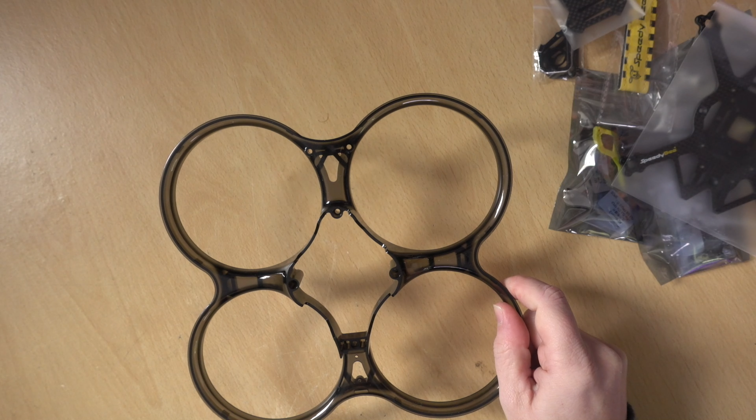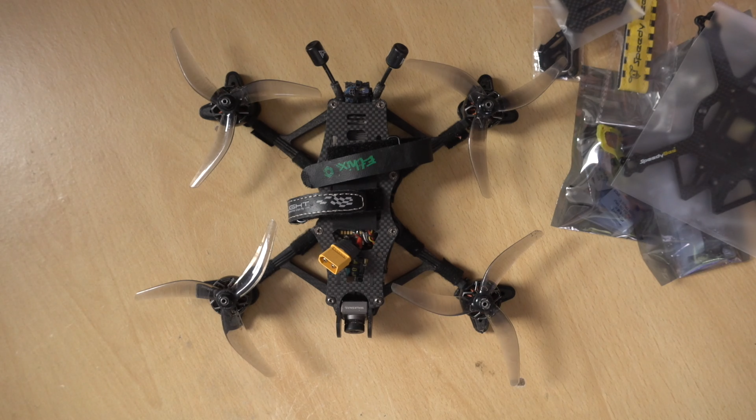Now I was hoping to do an actual build of this in this video, but unfortunately parts haven't arrived, so I'm just going to show you this and I'll do the build in a separate video. I was hoping to do the usual trick of chuck it on the table and all of a sudden it's built, but seeing as we don't actually have the parts, I can't do that. But we can still take a look at what we get.

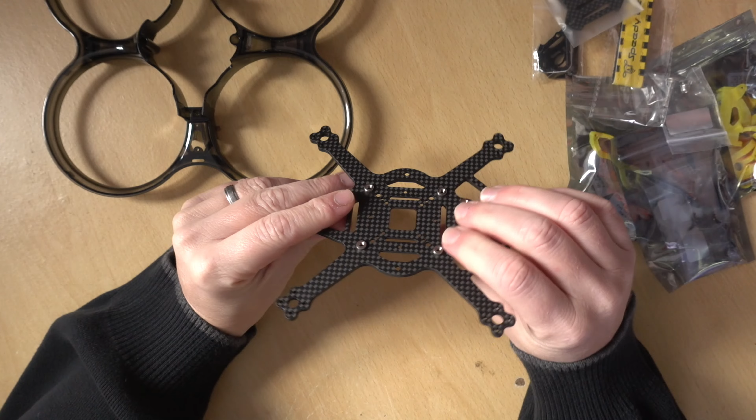So we get this pretty tough plastic main outer - these are obviously the ducts for the rotors. Inside of that we will have our carbon piece, and the nice thing is all the standoff parts have already been sunk into the carbon, so it's going to be a nice and easy assembly.

And then we get into all the sub parts. So we have these aluminium pieces here, which are for the camera mounts. You can see here we have some yellow and black TPU printed parts which go into these circles, and that's so you can use different cameras. The black is 19x2, so that's for most micro size cameras, and the yellow is 20x2, so that's if you're using DJI. They will just slot into these inserts and then the camera will be spaced properly.

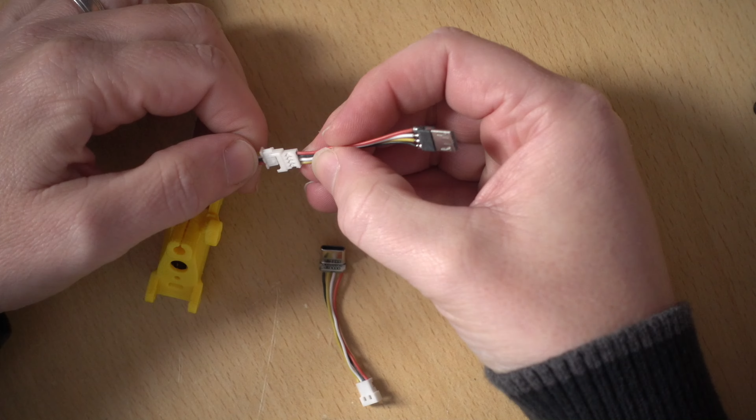Right, so let's check out some of these 3D printed parts as well. We have this part here, which is actually quite a nice little feature. What it allows you to do is connect up the USB output from your flight controller or VTX to make it easier to update. You also get these two cables here, which you'll plug onto there and then plug into the device that you want easy access to.

If you're using WalkSnail, for example, you could just unsolder some of these and put them directly onto the VTX and access it. That gives you some nice options to make it easy to update the flight controller or the video system using an external USB port.

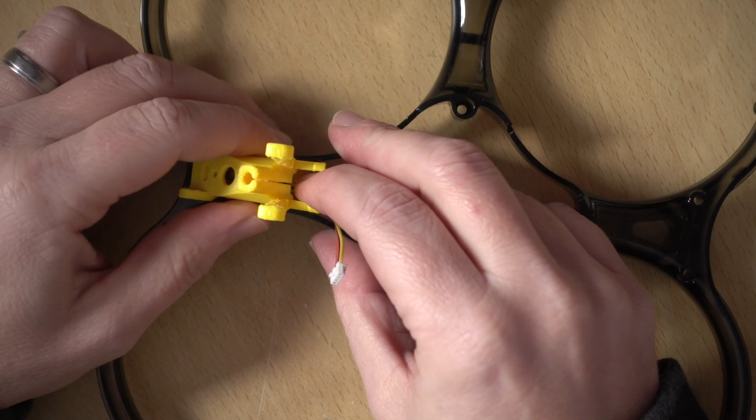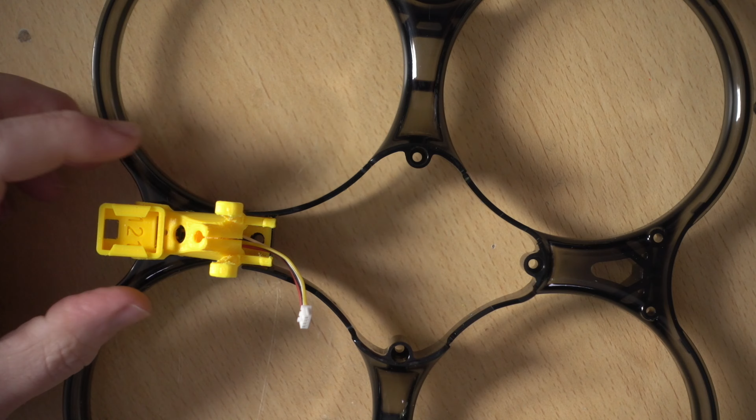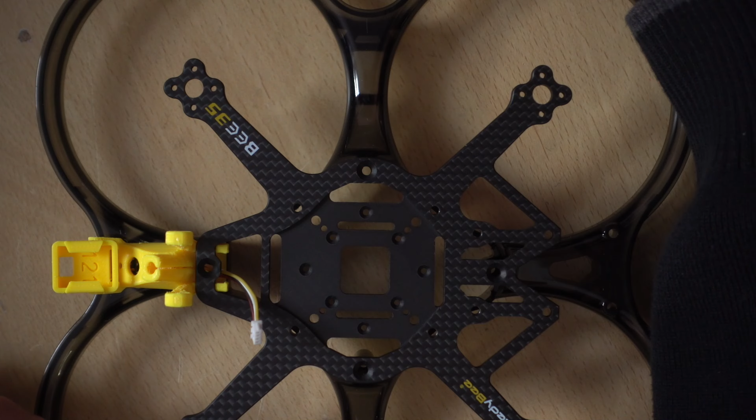We have this section here which will support a T-style antenna. If it's a 900 megahertz antenna, you can add these little supports on the side as well to give it extra support, which is a really nice touch. Of course, if it's 2.4, you don't need to worry about that. If you can see in the top, there's also a couple of holes for whip style antennas. They could also potentially be used for a dual video system. And then also on the top in the middle, you have an output for a single video antenna. So there's a lot of thought gone into this, which is great to see.

Another part that we get is this TPU part, which will hold a GoPro, any of the standard GoPro mountings. Next up we have this piece, and this is what makes this the Pro version. This is aluminium rather than carbon, so it's designed to dissipate heat, and you'd put your VTX in this section here. This bit of TPU has been designed to screw onto the frame to hold in the air unit.

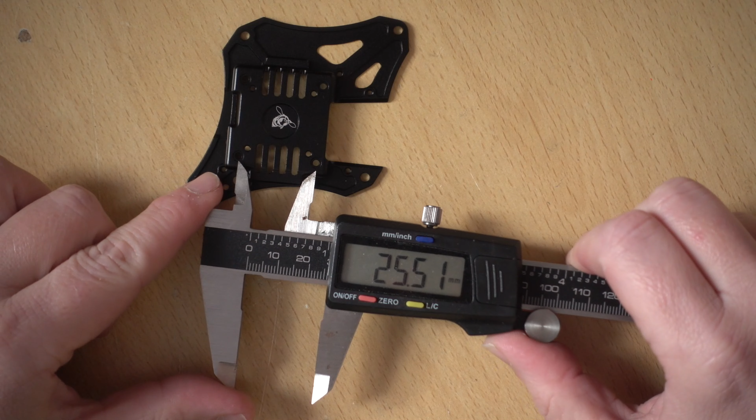If you're using the DJI air unit, or there are spacing holes underneath to screw up into if you're using a different type. Just to see what sizes we have here, the outer holes are about 25.5, so WalkSnail will fit in there. And I'm imagining the inner holes are going to be about 20—yep, so the inner holes are 20mm pitch. So there's a fair range of VTXs you'll be able to fit in there.

We also get this little piece here, which bolts on there. We get this top plate, which will obviously go on there, and there is a non-slip battery plate. Then you can put your battery strap through, or you can actually put your battery strap around the outside. But yeah, nice grippy bit of rubber.

So we get a bunch of different screws for different options on this system. We've got DJI, Run Cam Link, and these are basically different length screws for attaching the different devices. We get a load more screws in another bag—for camera and motor, for 25.5 all-in-one, for a 2020 stack—lots of different screws which are pretty nicely labeled. So when you're actually building this thing, following the manual, everything should have its place.

We've got some standoffs, we've got this adapter here that goes between the two camera holding plates, and this thing should fly together quite nicely.

Okay, so here we have the frame mostly built. As you can see, there are plenty of spare screws. Bear in mind, I haven't got a camera in here and I haven't got a flight controller in here, so some of these will be used up. I also haven't put the ones in the 3D print because I wanted to give them the most grip when I install it properly for the first time. But there's a lot of screws here that I have used and they have provided spares, so that's really nice to know.

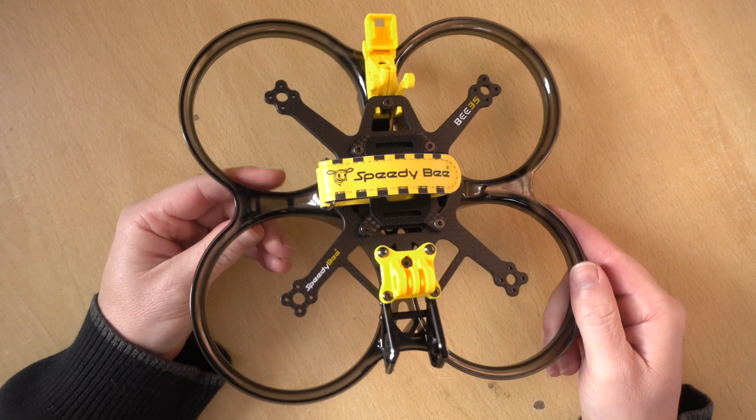As far as putting this frame together goes, it has been very nicely thought out, and if you follow the instructions, it all goes together really quite simply. Even though there are different size screws, it's not difficult to get this thing built up if you follow the instructions. And with that, let's take a quick look at the instructions because they almost caught me out.

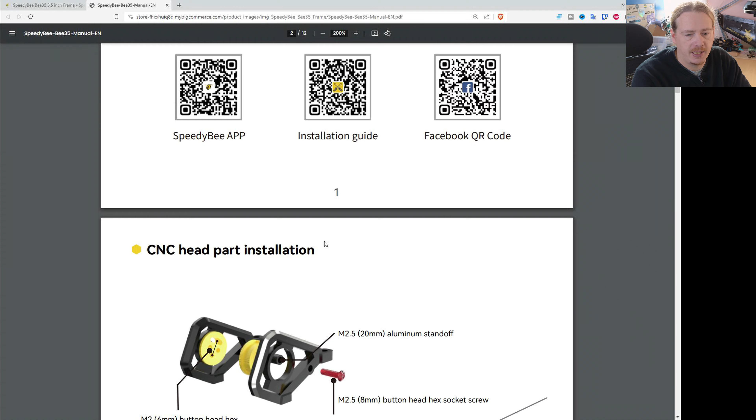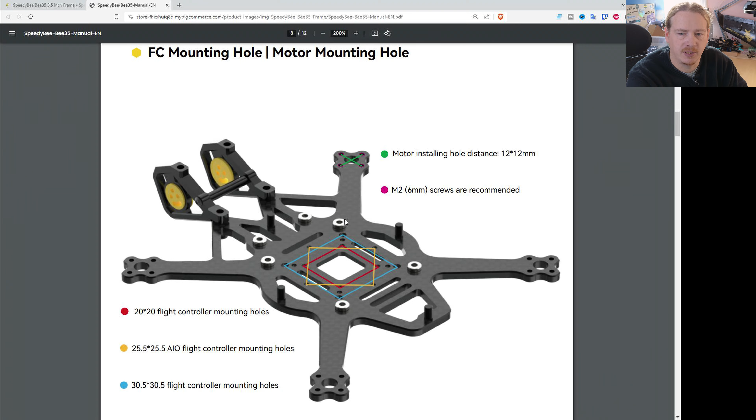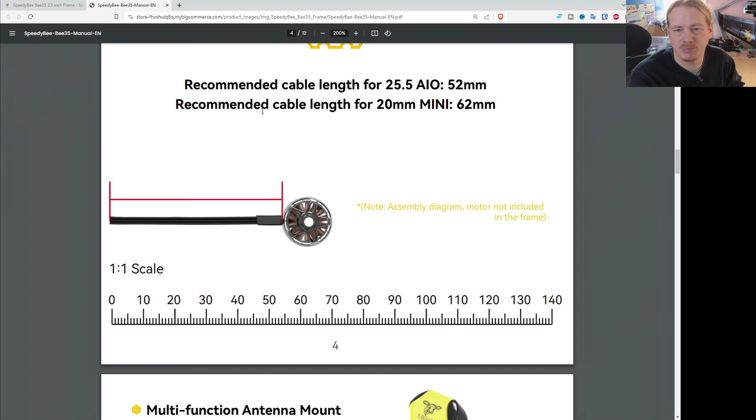So I was looking through the manual and you start seeing all this sort of stuff. It's got the installation for the camera bit and a bit about the antenna, then it goes into the flight controller, which so far so good. It's giving you the different mounting holes for the different layouts. The ESC gives you a scale length, which isn't so great when it's not a printed manual, so don't hold up your motor wires to the screen, but it's got recommended cable lengths. All so far so good.

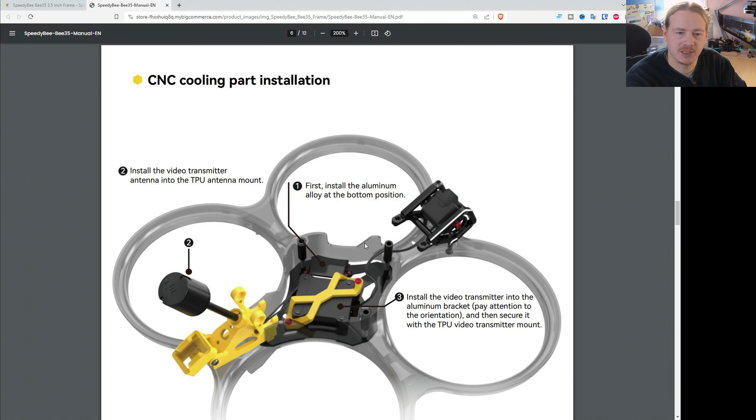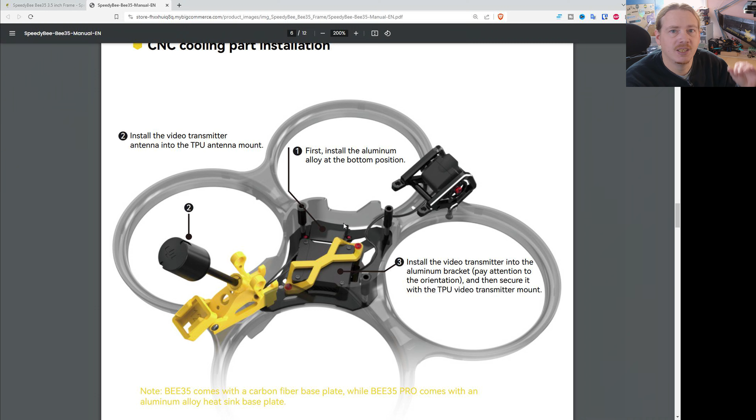The bit that started confusing me was this page right here for the installation of the CNC cooling parts, where it says install this part first, then this part, then this part. But if you'd seen on the previous screens, there's no mention of screw sizes or whatever. Just keep scrolling, because when you get past this part, the installation becomes back to normal again. So I'd actually recommend not doing this step first.

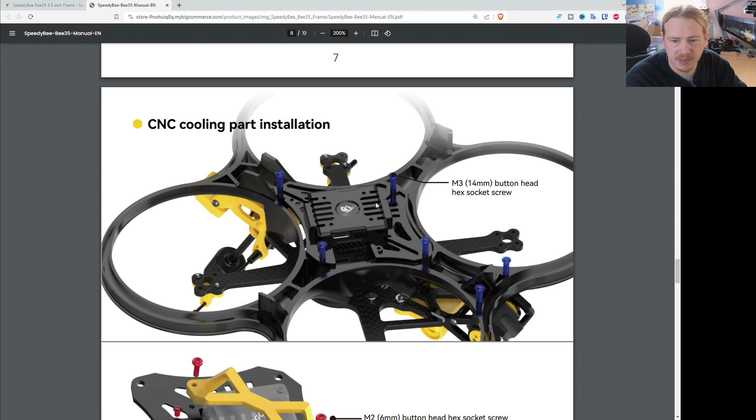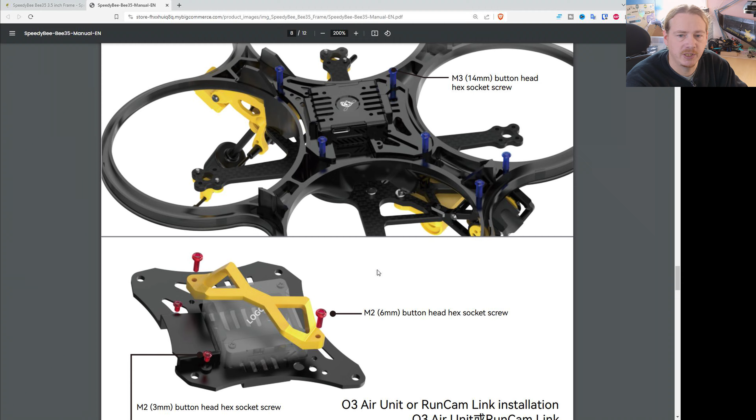You can maybe attach the camera part if you want, but I would start with this step right here, because getting these little screws in when it's inside is a bit trickier than when you've got it outside. So I would do this part first and then put that whole unit up inside the frame and then carry on from here. But from then on, it's really nice and straightforward to how you set this up.

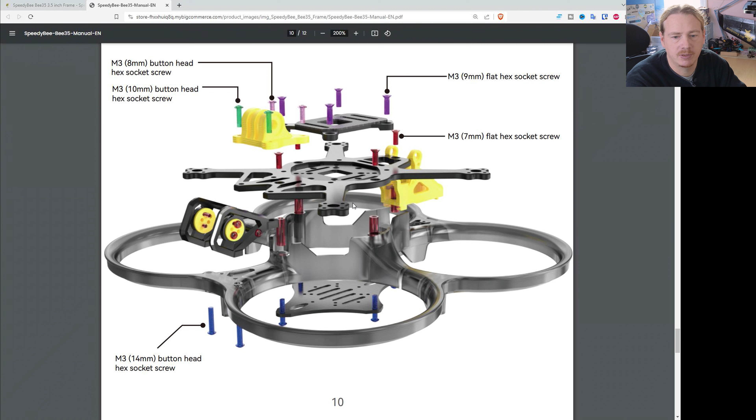It's really straightforward. All the different screws are different colors. So we have the green and pink here for the GoPro holder, for the sizes, the purples for the top plate, the reds for the main plate or bottom plate, whatever you want to call it. The blues, which actually should already be in there, but they're showing them again. You've got the standoffs here as well, which go in between the bottom plate and this top plate.

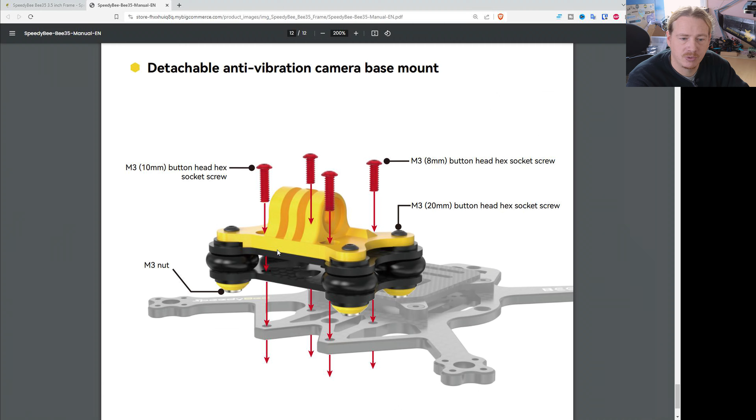But yeah, the actual build guide is really nice, well written, and if you follow it, you can't really go wrong. So yeah, really good job here. They've even got the optional anti-vibration GoPro holder. So yeah, my first thoughts on this is that it's a really nice frame. The manual is good, it's been well thought out.

The next step is for me to actually get some components installed in here and see, firstly, how easy a proper build is. I've just thrown this together, but how easy is a proper build, which I'm actually thinking it's going to be really quite simple, because once this sort of main carbon plate is off, the all-in-one will go on the bottom of it - well, so it'll be the top when you're working on it. The motors are here, so it's all going to be nice and easy to solder up.

The only thing that may cause issues is the VTX, connecting that to the flight controller, but if you've got a reasonably long cable, that's not really going to be an issue either. And then just sandwich it all together. So yeah, I'm looking forward to getting this built up, which I will do ASAP as soon as the parts arrive, and we'll have a continuation video.

I'm going to throw myself in at the deep end and see how hard it is to get a 30.5 stack in there, partly because I have SpeedyBee's F405 V4, so that's going to be going in here. We'll see how difficult it is. I've not built a 3.5 inch quad before, so let's see if I can actually get this done in a neat enough build. But we'll see that in the next video.